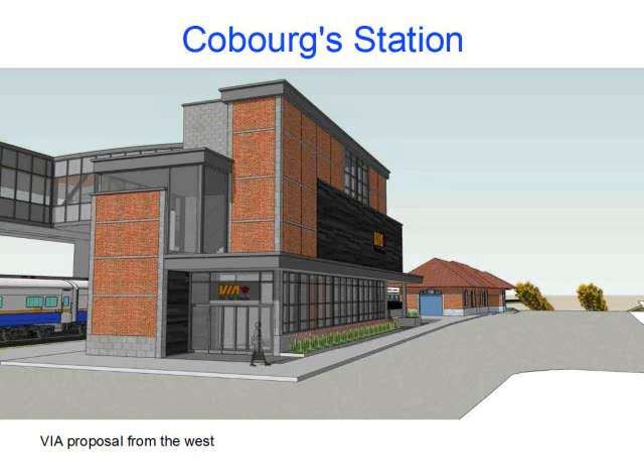In November 2010, Via Rail announced to the media that the existing station would be retained and that a bridge would be built to the new additional platform, providing two artists' impressions of the proposed bridge. The ACO and others contacted Via Rail for further details, such as a site plan, floor plans, and elevations. In early December, Via wrote that they had not as yet designed the bridge. We understand the Mayor has also asked for similar information, and the Cobourg Heritage Committee is keeping the Via station on its agenda as unfinished business.

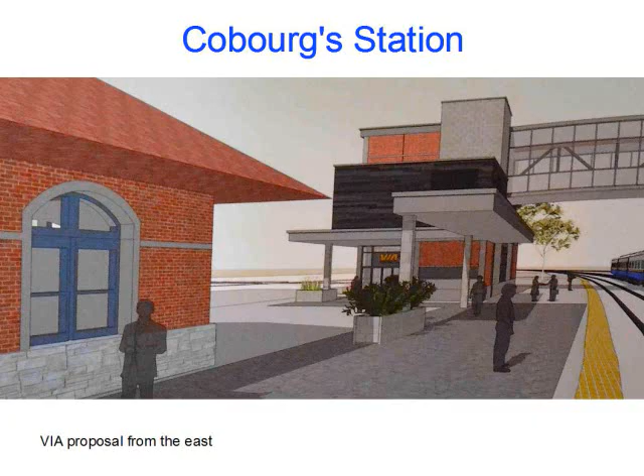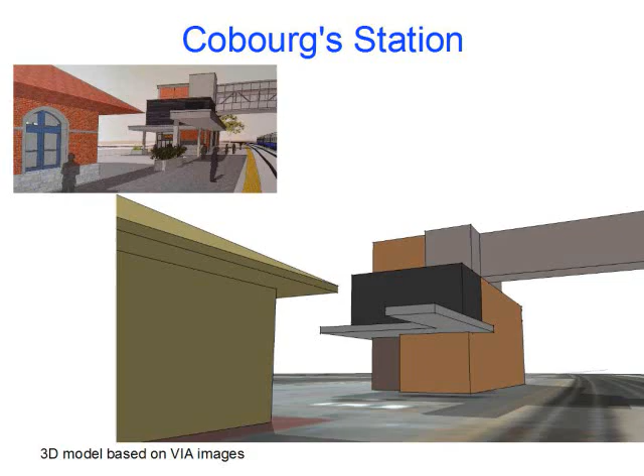Based on the limited information available, this computer 3D model has been developed to facilitate understanding of Via's proposals. This slide and the next were created as comparisons with the images released by Via. The model is more diagrammatic than the Via images indicate, since this is clearly a work in progress rather than a final design. The method used is the same as has been used for the downtown model and various development proposals within Cobourg. However, Via's pictures show only half the story, as they only show a structure leading up to a bridge. As they say, what goes up must come down.

Assuming the building shown by Via is not overly large for its purpose, the other side of the bridge is probably of the same magnitude. The bridge has to be high enough to provide a minimum clearance of 27 feet underneath it, so that freight cars with stacked containers can travel under it.

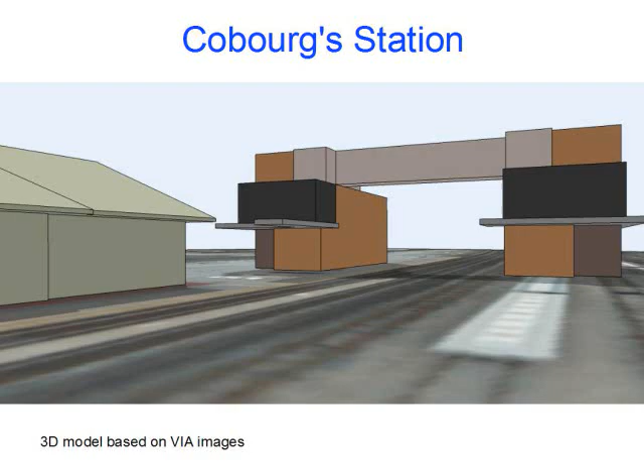The 3D model and a 3D model of our existing station have been superimposed on aerial photography to illustrate the comparative sizes and the impact on the station parking area. It looks as though about 25% of the parking to the east of George would have to go.

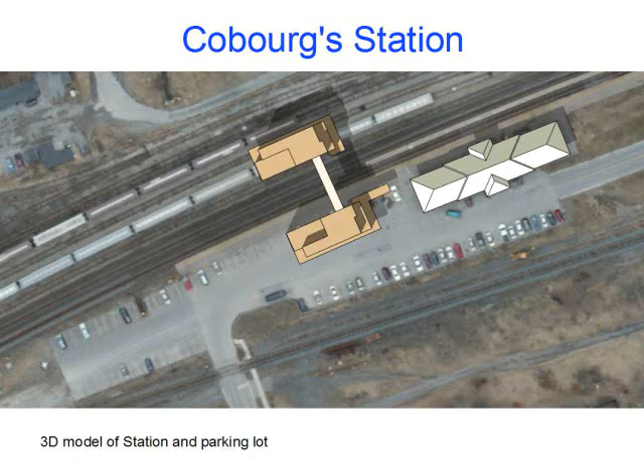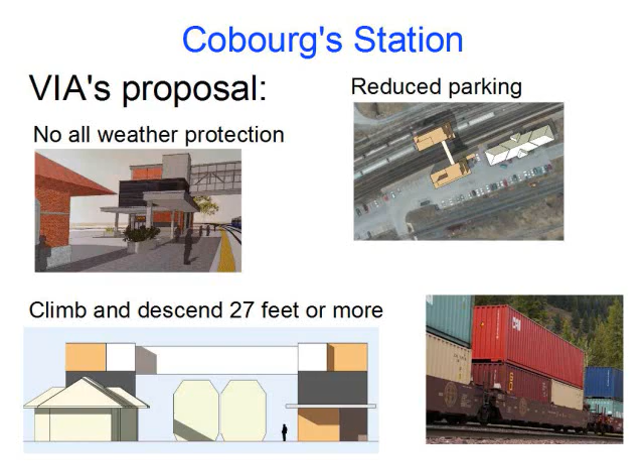There are three major implications for the travelling public: having to go from one building to another to access the new platform, a significant reduction of parking available plus possibly limited area for taxis and waiting cars, and having to go up two stories and then down again to get the train.

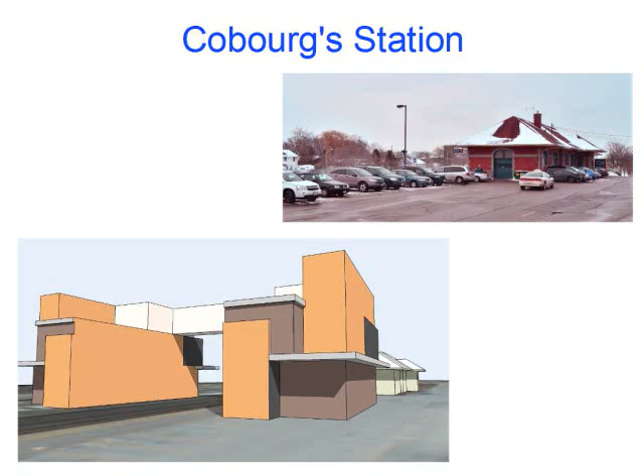From a heritage point of view, Via's proposal retains the existing station but overwhelms it. The design should comply with the Parks Canada Heritage Guidelines, which refer to alterations and additions to listed buildings and developments adjacent to listed buildings. Via has written that the proposed new building will be about 35 feet high.

By not providing all-weather accessibility from our station to the new platform, that is, physically connecting the two, Via has in effect tied Parks Canada's hands over a proper heritage review. It is a case of meeting the letter of the law, but not its intent.

Of note is the paragraph in the Parks Canada Statement of Significance, which addresses the importance of the station's site and setting. I quote: 'The station retains its relationship to its site, including the adjacent tracks and sidings and the associated adjacent area of industrial and residential development. The building is prominently located and is considered locally significant.'

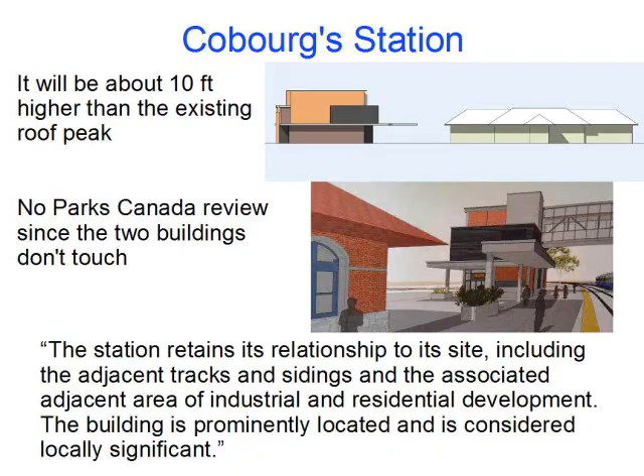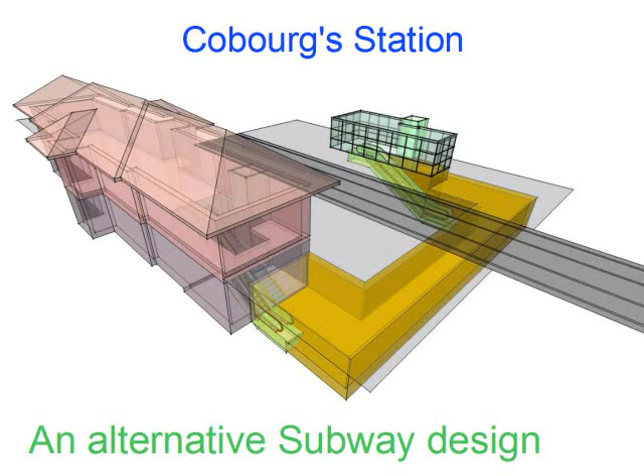There is, we understand, a full basement under the existing station. Therefore, would it not be possible to install a stair, elevator, and maybe an escalator down to that basement level, to lead into a subway under the tracks? All the work required would be at the east, unused end of the station, with no or little impact on the continuing operation of train service.

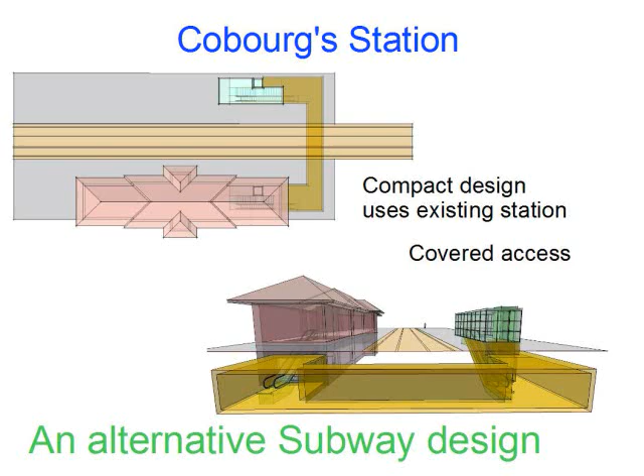The subway need only be in the order of 12 or 13 feet below grade, half the level change required by a bridge. This proposal would utilize our existing station to its fullest, yet leave the station and its parking lot as is. The new platform could have a simple single-story building on it, designed as a sympathetic but 21st century structure that does not detract from or overwhelm our heritage station.

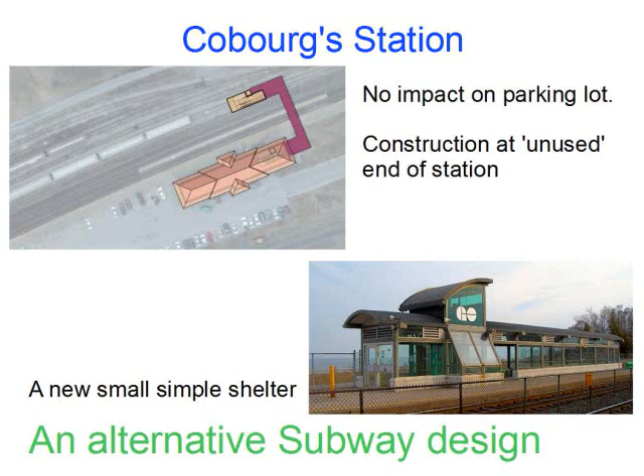We don't think there is a need to tell the honourable members of Council that heritage is an important part of the fabric and community of Cobourg. The Grand Trunk Railway Station is a pivotal part of that heritage, a connection that has been lost in so many other communities. Occasionally, Council has to take steps to preserve the best of what we have.

In this case, we feel that Cobourg will not get what it deserves by accepting whatever Via offers us. We should be willing to tell Via what we want. Therefore, we request that Council pass a motion that says: since a subway connection, rather than a bridge, would better respect the aesthetic and heritage importance of our station and provide greater convenience to the travelling public, Via are requested to reconsider their current proposal.